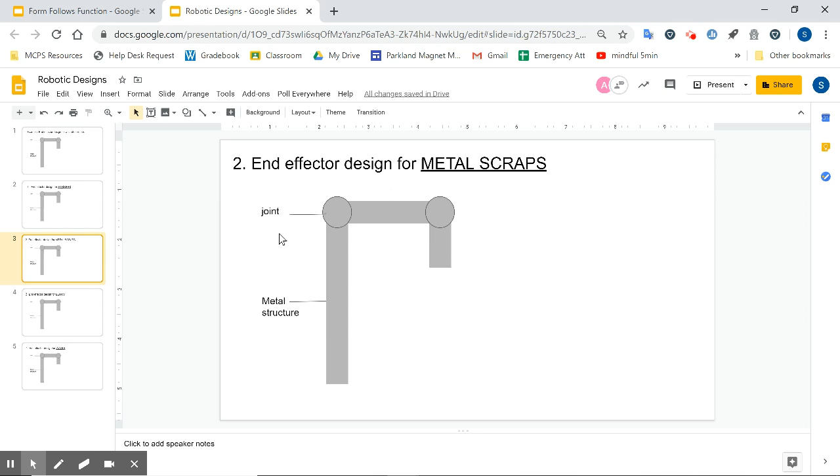So the first one is for markers, the second is for metal scraps, the third is for Legos, and the fourth is an end effector that you can design to move and manipulate water. If you go back to the PowerPoint, you will see there is a picture to go with each one of these different end effectors to help you think about how you want to design it.

So now let's go back to the cardboard box. How can I design an end effector to pick up a cardboard box? I want to think about the different types of end effectors: we had 2-pinch claw, 3-pinch claw, suction cups, and all kinds of other stuff. For a cardboard box, I don't want to pinch it so it pokes into the box or tears it, or if it's a claw, it won't get underneath very well.

So I'm thinking suction cups will be the best option, but I'll need a number of them so it can hold different parts of the box without slipping and falling. There are 2 ways I can go about this: I can draw my own images using the shapes up here, or I can search for an image on the internet that might help me.

First I'm going to create the part where my end effector is connected and what my suction cups are going to stick to. I'm going to use a triangle because it creates a nice big wide area to put suction cups on to hold my box. I'm going to change the color to match my metal arm so it all matches.

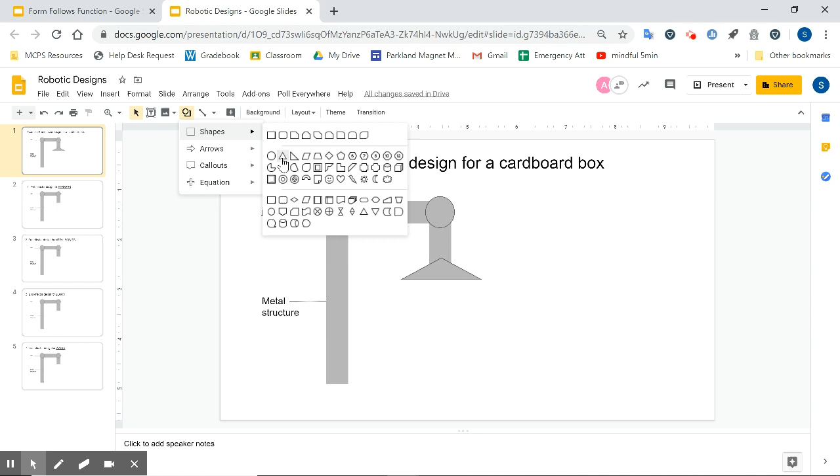So you can see here, now I have my spot for my end effector. This is my end effector, but now to put the little suction cups onto it, I can create little pretend suction cups by making little triangles to represent them. If I do a small triangle, change the color, then do Control-C, Control-V, and use my arrow keys, I can make lots of them. It makes my life a little easier since I don't have to recreate everything. Now I have a whole army of suction cups that can help me lift this box.

Now let's see if that's actually attached. Nope, scoot it over. Okay, now I just need to label it so my teacher understands what I'm thinking. I'm going to use the line tool up here and draw a line to my suction cups, then use the text box to describe it. I'm going to type in the word suction cups.

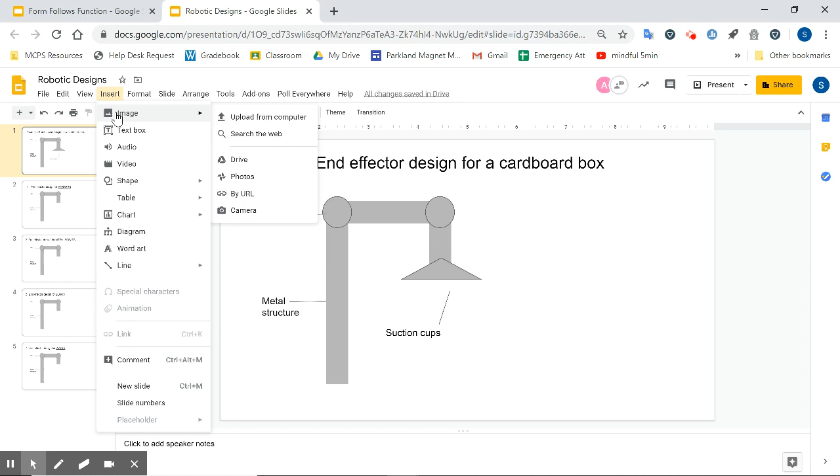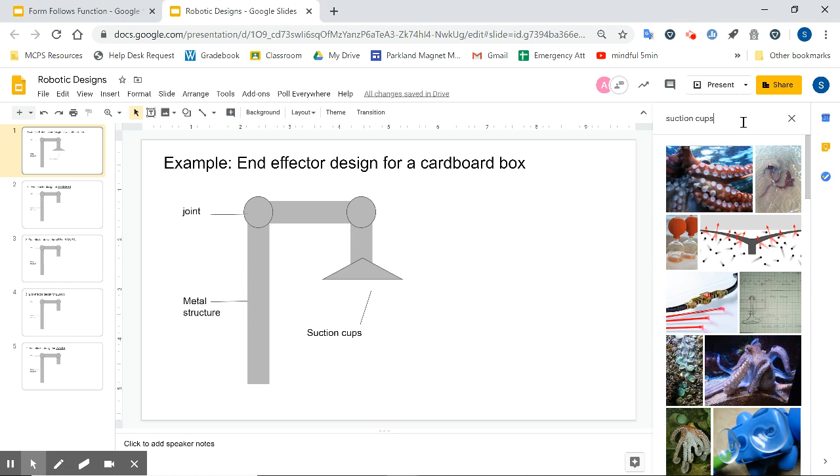So the other thing we could do is if you don't want to draw something or you're having a hard time representing it well, you can import an image from the internet. If I come up to insert image, where you have this mountain shaped box, or click the image tool, you can search the web. If I type in suction cup, it gives me a lot of options, and I just want one, so let's go back to that.

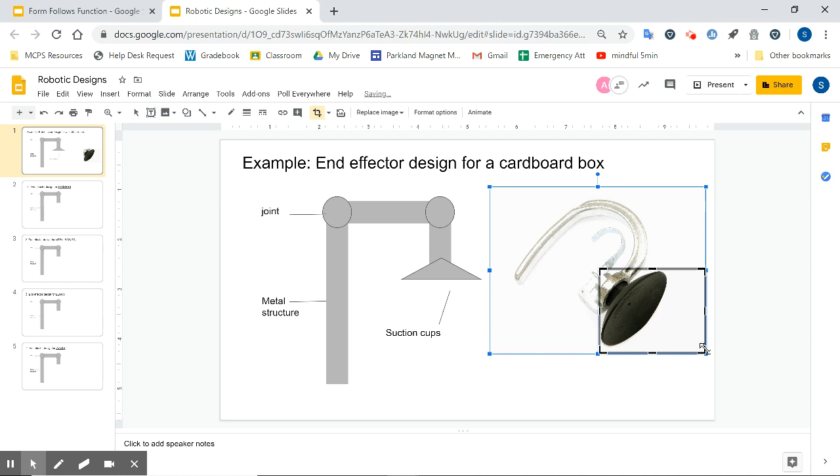Okay, this image will work, but it has a lot of extra stuff I don't need. So I'm going to click it, say insert, and then use this tool that says crop, which lets me cut the image to get rid of a lot of the background and just get the part I need. Then when I hit enter, the rest goes away.

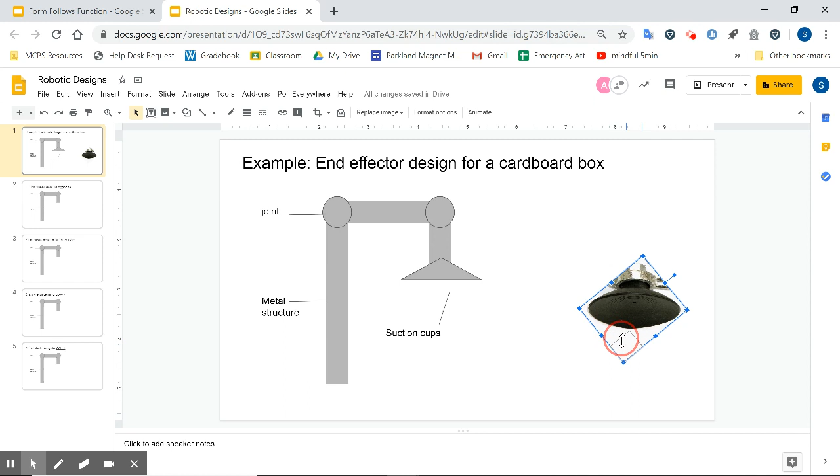Now my suction cup is facing the wrong direction, so I'm going to turn it so it's facing down. Obviously this is way too big, so now that I've made it the way I want, I'm going to make it smaller so it fits on the bottom of my end effector. Here's one, scooch it down just a smidge, let's see if that works, a little bit up I guess.

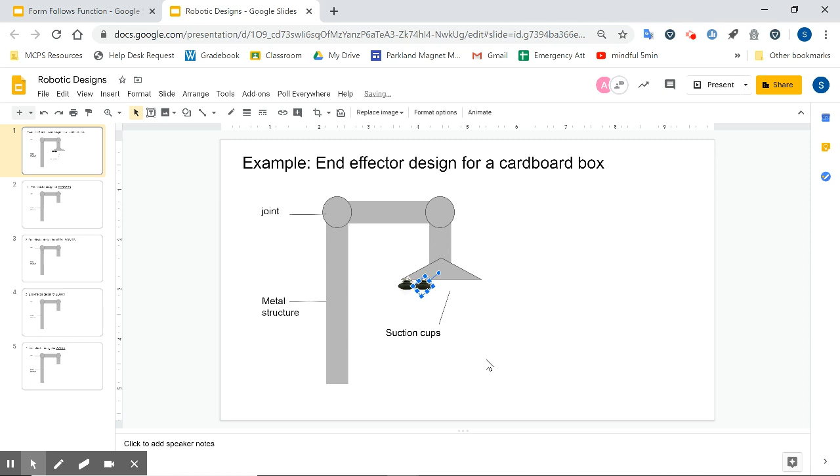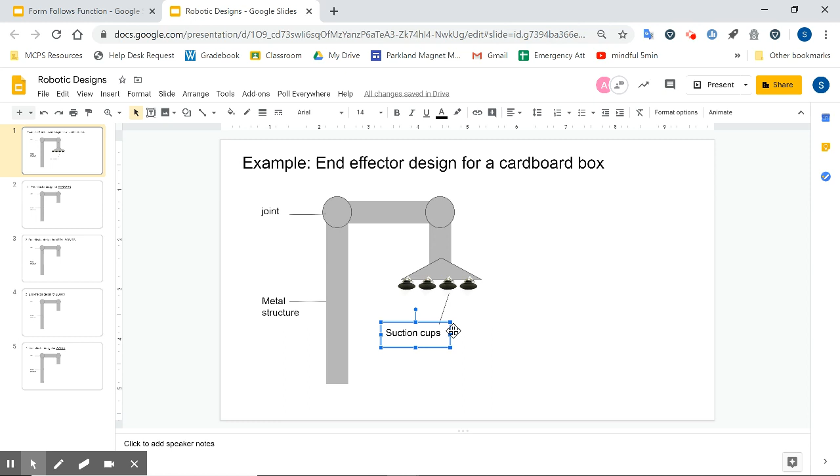Okay, now I just need to make lots of them, so I'll do Control-C, Control-V, scooch it over, Control-C, Control-V, scooch it over, and again. Now I have my end effector with suction cups, and I have my label here ready to go. So that is what you can do.

If you want to draw it by hand and then import the image, you can come up here and do camera, then hold the picture in front of the camera, and it will insert your hand drawing onto this page as well. So that's another option.

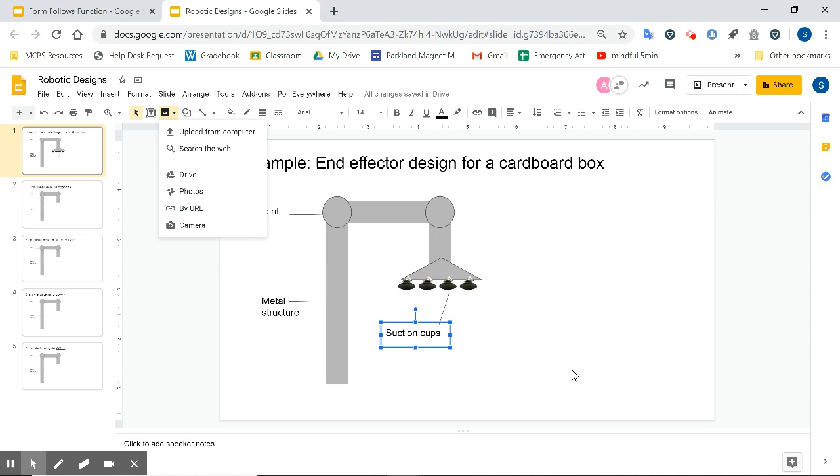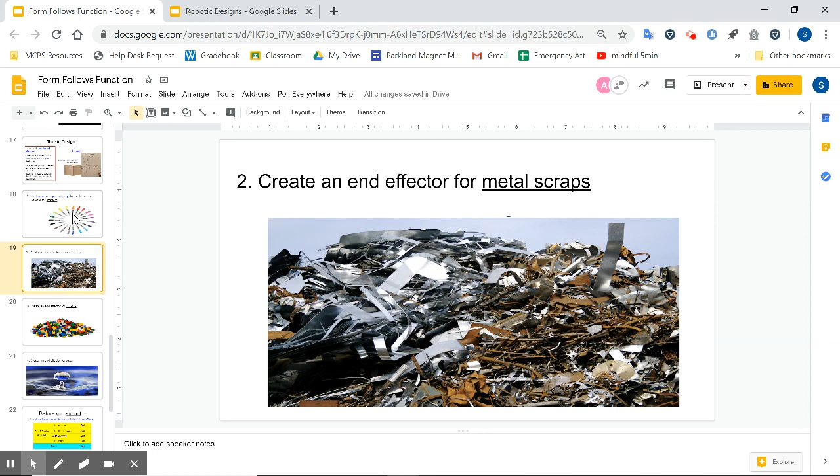So if you come back to your PowerPoint, when you get to the end, after you've done your design for your marker, your metal scraps, your Legos, and your water, you can check here to make sure you have included everything.